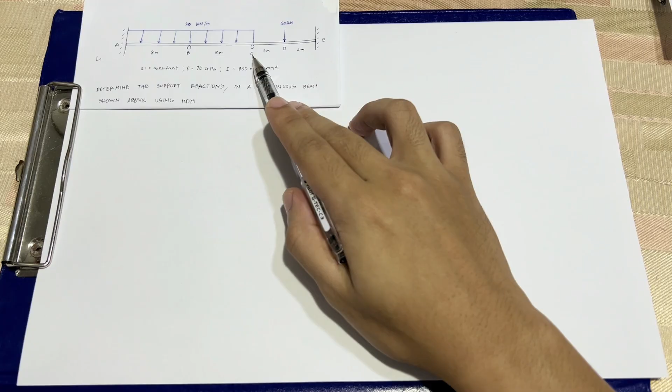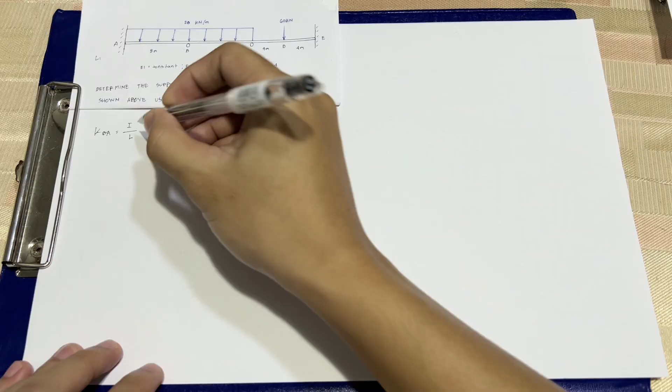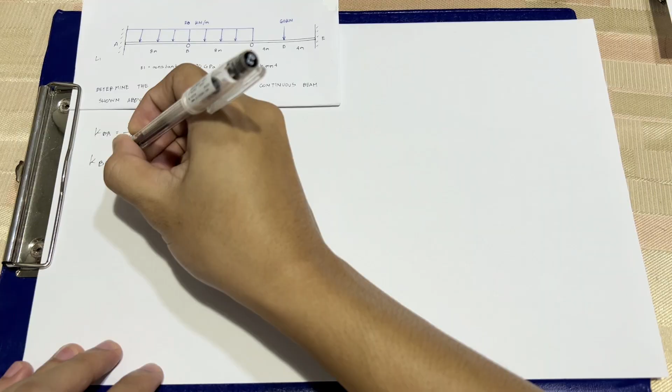So, to start, solve natin yung distribution factor about the joint B and C. Before that, solve natin muna yung member stiffness. Sa member stiffness ng B to A, we have a formula of I over L because the far end is fixed. Ito yung formula na susundin natin. We have I over L, what is the length of that member, that is 8. And then, sa member stiffness naman ng B to C, we have the same formula, I over L, because this one is continuous. So we have I over 8 pa din.

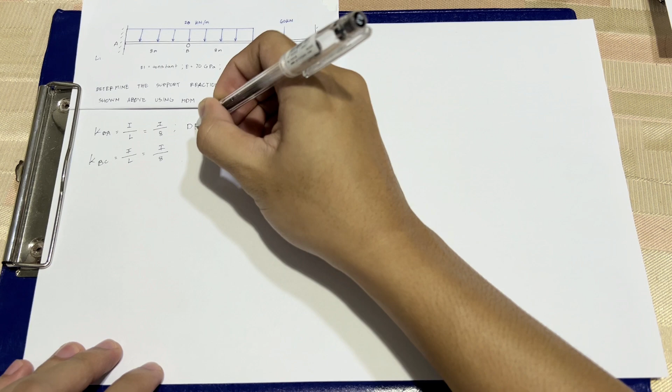Now, solve naman natin yung distribution factor about B to A. Formula natin dyan is the stiffness of one member over the total stiffness at the joint. Dito sa ibabaw, ibig sabihin nun, yung member stiffness nitong BA and then the total stiffness sa joint, pag-combine lang natin yung stiffness ng BA tsaka ng BC.

So, substitute natin yung values. We have here KBA, I over 8. And then KBC, I over 8. And then yung KBA natin is I over 8. Kung mano-mano natin isosolve yan, pwede natin ibaba yung 8. Plus natin yung I over 8 plus I over 8, that will be 2I over 8. Cancel yung 8, cancel yung I. So meron tayong 1 over 2, that is equivalent to 0.5. Pero kung ako mag-solve yan, pagdating na sa mga quizzes, since alam ko na maka-cancel yung I, palitan natin ng 1. So we have 1 over 8 over, this is the main bar, 1 over 8 plus 1 over 8. Same lang yung makukuha nating answer.

Dito naman sa distribution factor ng B to C, palitan natin yung numerator ng member stiffness niya. That is KBC over KBA plus KBC. That is also I over 8 over I over 8 plus I over 8. That is also equivalent to 0.5.

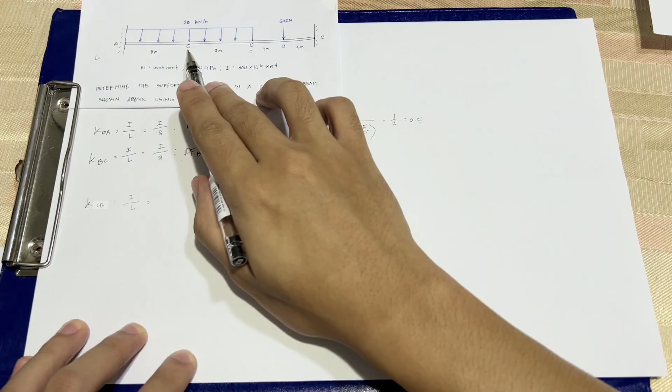Ngayon, dito naman tayo concerned sa joint C. So what is the member stiffness of C to B? That is C, sorry for that, C to B. We have I over L pa din. Since this one is continuous, we have I over, what is the length? That is 8, length of the member from C to B.

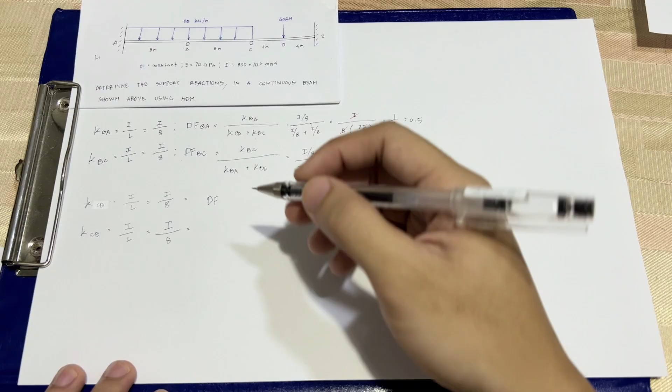So we have the member stiffness naman, C to E. We have the formula of I over L since this one is a far end na fixed. So we have I over 8 pa din. Since both yung dalawang to is similar and same lang dito sa ibabaw, we can therefore conclude na yung distribution factor ng CB is equivalent to 0.5. And then distribution factor ng C to E is equivalent also to 0.5.

So, try to prove that one, solve nyo using this formula. Of course, yung numerator is papalitan nyo nung member stiffness nung concern natin. Dahil the same lang, I over 8, and I over 8 lang din naman yung member stiffness ng CE, so 0.5 din yung makukuha natin.

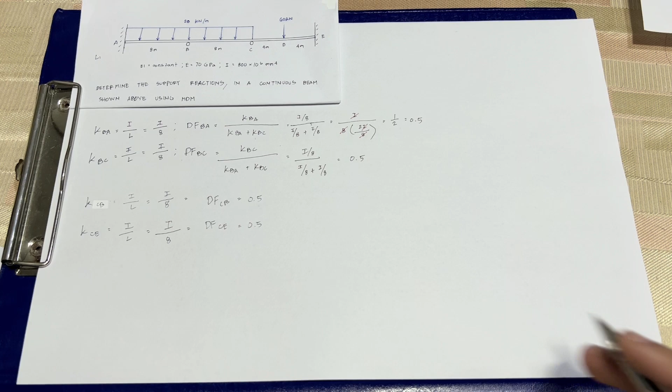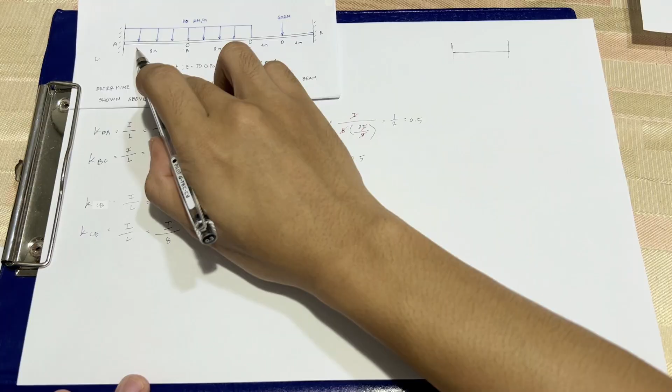So, ngayon, pag-usapan naman natin yung fixed end moment. Dito tayo nakatingin. We have a uniformly distributed load here na 20 kilonewton over meter. This is point A, this is point B. So we have a fixed end moment here, fixed end moment here. We have fixed end moment AB. Ito yung tinitignan natin.

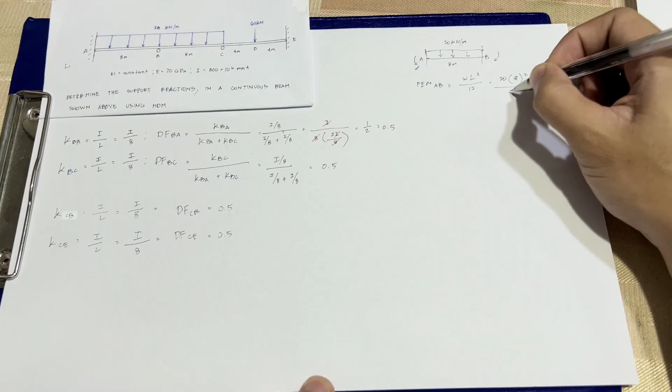So the formula for this one is WL squared over 12. So W is the uniformly distributed load na 20. And then the length is 8 meter. So we have 8 squared over 12. So this is equal to, we have 20, 8 squared over 12. So this is equivalent to 106.67.

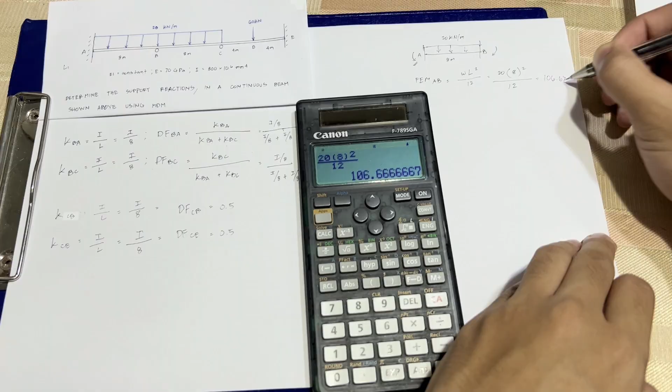So fixed end moment naman ng B to A, dito tayo concern. We have the same formula, however, it is negative.

Due to our sign convention, whenever we have a counterclockwise moment, it's positive. Whenever we have a clockwise moment, it's negative. So we have negative L squared, so WL squared over 12.

Let's substitute the values. So we have negative 106.67. Now let's get the fixed end moment of BC. We have moments here, then moments there. This is the uniformly distributed load of 20 kilonewton per meter, and this one is 8 meters.

Fixed end moment of BC. We have the same formula, WL squared over 12. Let's substitute the values, divide by 12, and we get 106.67. Now we're concerned with the fixed end moment of CB.

As we mentioned earlier, clockwise is negative. So let's substitute the values. 12 is equivalent to negative 106.67. Now let's focus on this member.

So we have a fixed end member. This is C and this is E. We have a point load here at the center, 60 kilonewton. The distance here is 4 meters and the distance here is also 4 meters. Now let's discuss the fixed end moment CE.

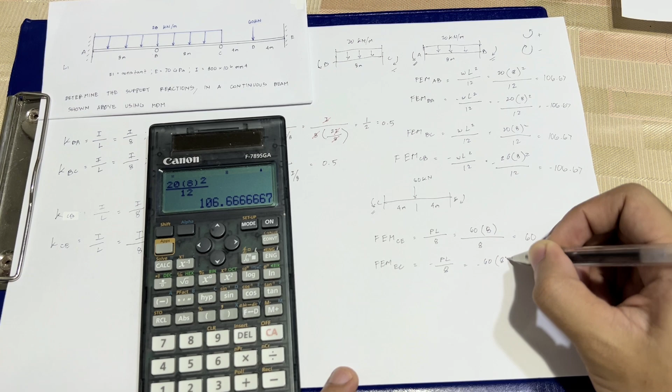Now for the fixed end moment of EC, we have negative PL over 8. Let's substitute, and we're going to have negative 60 here.

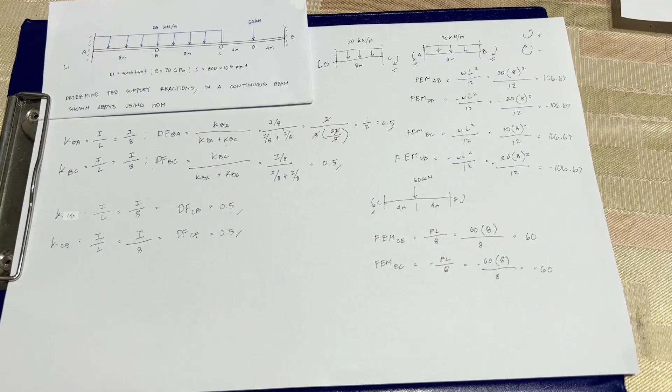Since we already have the distribution factor and the fixed end moment, let's now make a table. Let's move on to our next step.

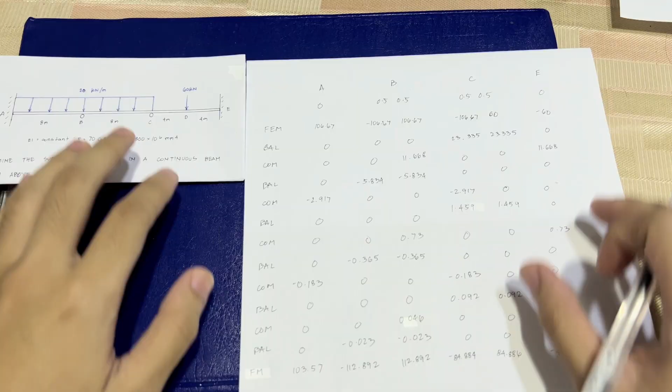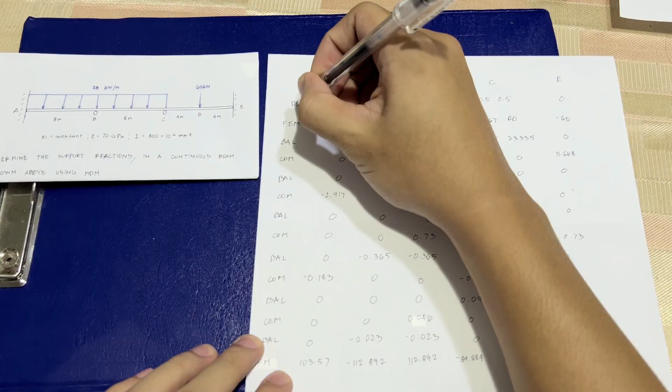You'll notice we have a table here with values. Let's discuss how this was obtained. We have point A here. Since we know that the distribution factor on the fixed end is 0, these are the distribution factors. Earlier we computed that the distribution factor of BA is this.

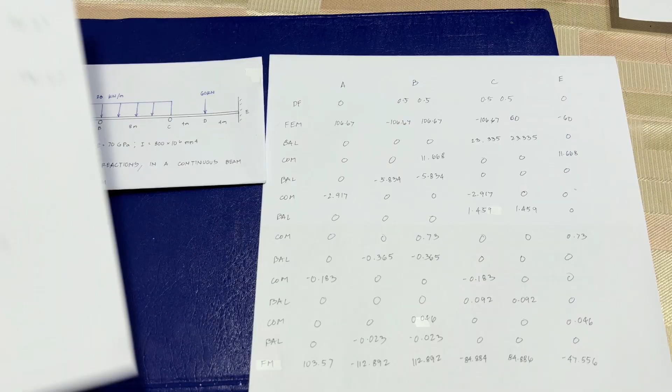Let's show where it came from. The distribution factor is 0.5, that's BA. Distribution factor at BC is 0.5. Distribution factor at CB is 0.5. Distribution factor at CE is 0.5. And this is once again a fixed end, so the distribution factor will be 0.

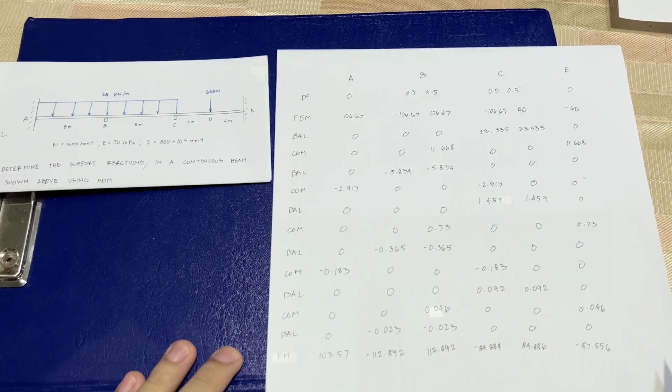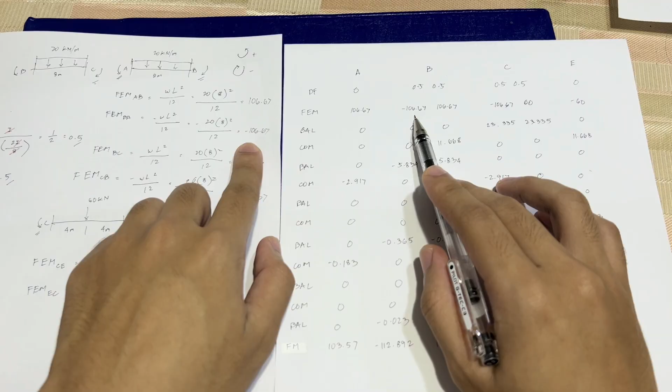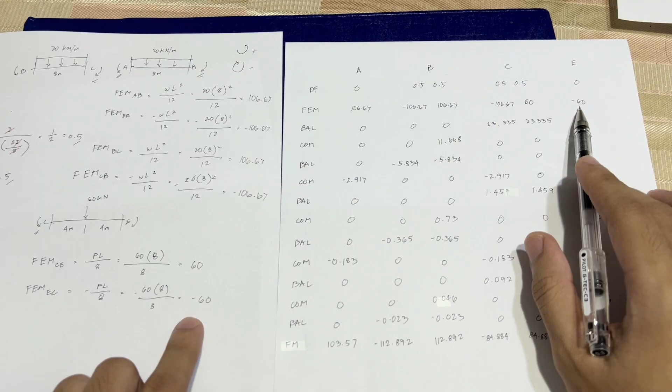Now for our fixed end moments earlier: at A we have 106.67, at BA we have negative 106.67, at BC we have 106.67, at CB we have negative 106.67, at CE we have 60, and at EC we have negative 60.

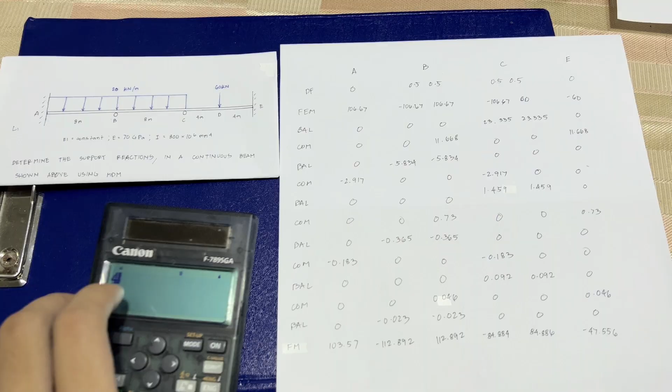The next step is to balance these two. Since we know, let's still calculate: negative difference of 106.67. We know this will become 0. But let's calculate, multiply by the distribution factor of 0.5, that will become 0. Then multiply by the distribution factor, that will also become 0.

Now let's discuss this one. We have the negative difference of those two. Multiply by the distribution factor of 0.5, so we have 23.335, and the same for CE, since they have matching distribution factors, they'll have the same value.

Now, how did we get the 0 here? That is negative 60 times the distribution factor of 0, which is 0. And here, how did we get the 0? We have 106.67 times the distribution factor of 0, so we get 0.

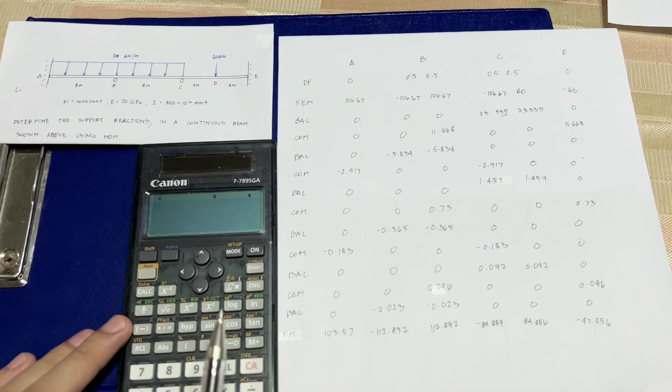And then here, summation: 106.67 plus 11.668 minus 5.834 plus 0.73 minus 0.365, plus 0.046 minus 0.023.

So they have the same magnitude value, however they have different signs.

So here: negative 106.67 plus 23.335 minus 2.917 plus 1.459 minus 0.183 plus 0.092.

So the value is negative 84.884, and then here, summation: 60 plus 23.335 plus 1.459 plus 0.092. So the value is 84.886. Let's accept that.

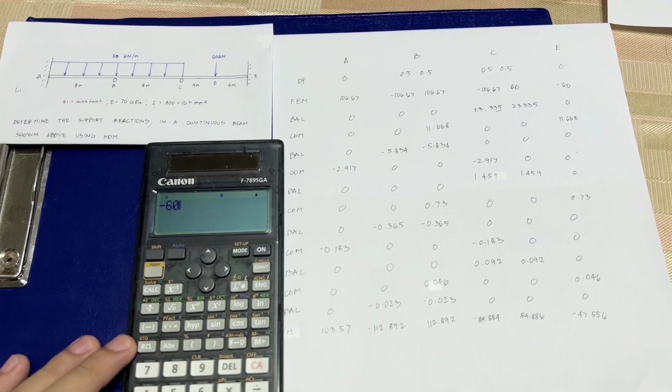So negative 60, summing this up, plus 11.668 plus 0.73 plus 0.046, we have negative 47.556. So now, let's substitute the values.

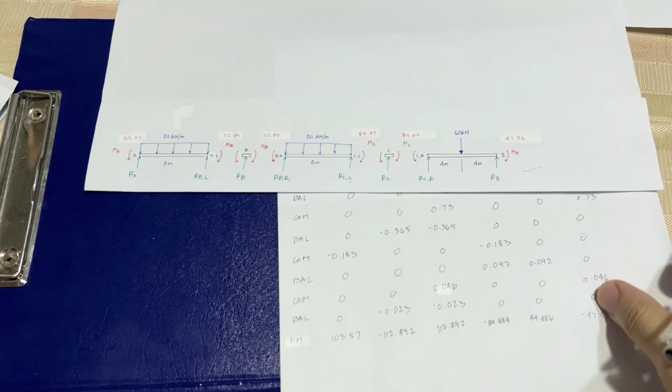Substitute natin yung mga values na final moments na nakuha natin, no? Since kanina, nabanggit natin na clockwise is negative, and then counterclockwise is positive, okay?

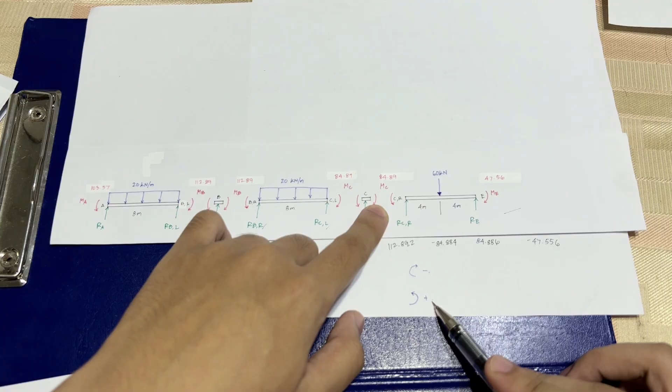So, since this one is positive, so we have a counterclockwise here. This one is negative, so we have a clockwise here. This one is positive, so we have a counterclockwise. This one is negative, so we have a clockwise. This one is positive, so we have a counterclockwise. This one is negative, so you're going to have a clockwise moment direction.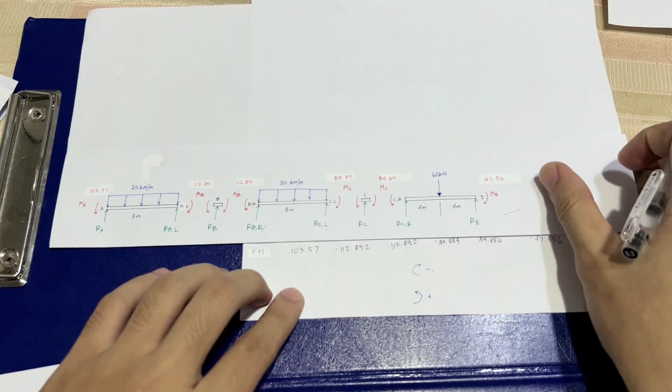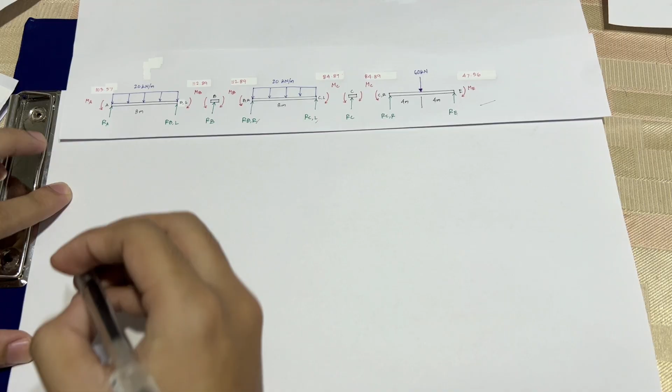So, na-substitute na natin yung values, no? Ngayon, solve naman natin to using the equilibrium equations. So, tingin tayo sa segment AB. Summation moment about B left is equivalent to 0 dito.

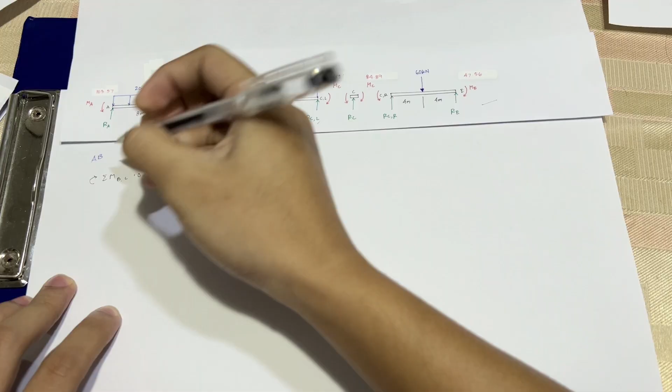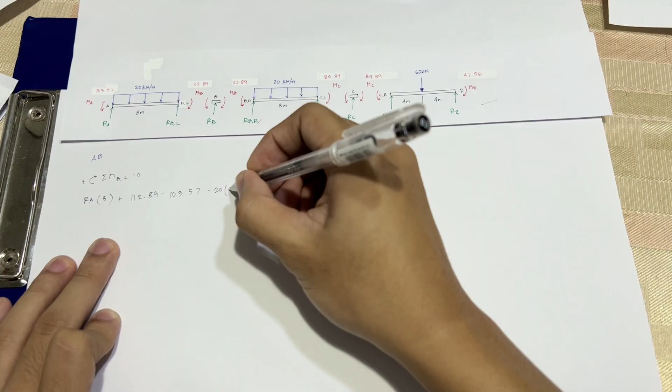Assuming that clockwise is positive, so we have RA times 8, plus yung eto. Since this one is clockwise, so we have 112.89 minus the counterclockwise moment, 103.57. Then minus natin yung downward na external force times the moment arm na 4. So, we have here RA, the unknown, 112.89.

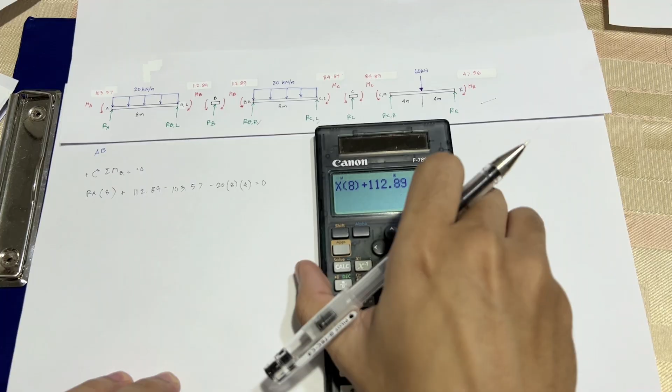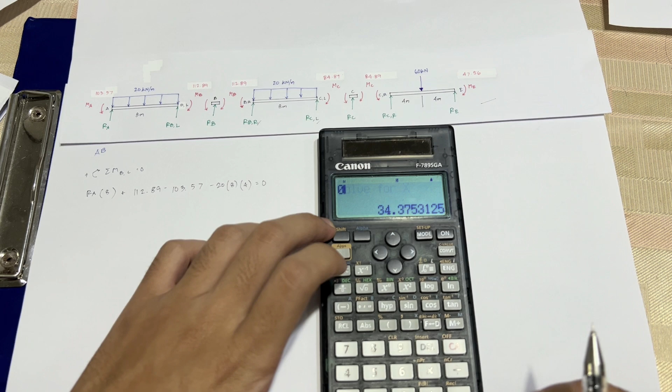Sinubstitute natin yung values na naka-round off sa pangalawang decimal, 103.57, so 20 times 8 times 4. So we have RA, the vertical reaction about A, 78.835 kilonewton.

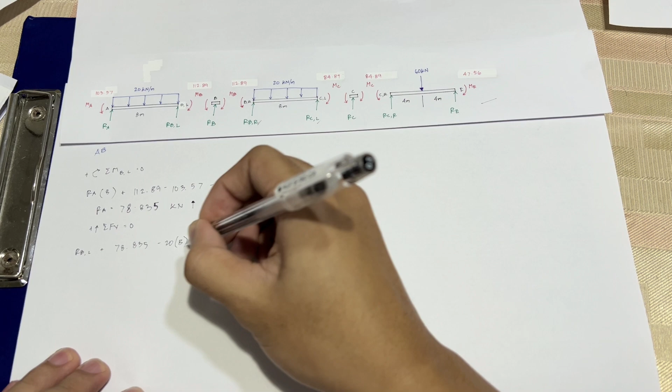So that is upward. Summation forces vertical is equivalent to 0. Upward is positive. We have RB left, plus 78.835 minus 20 times 8 is equivalent to 0. So we have RBL is equivalent to 81.165 kilonewton.

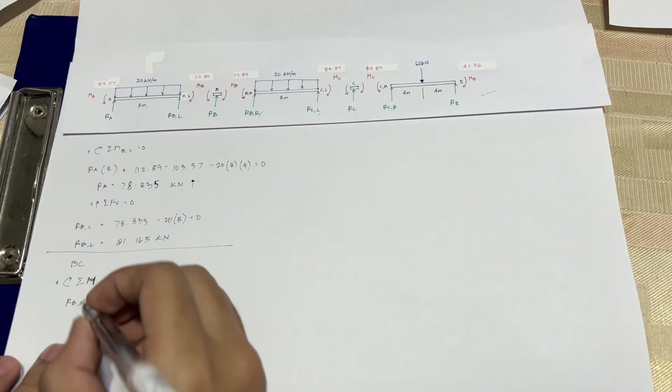Dito naman tayo sa segment BC. Summation moment about C left is equivalent to 0, assuming that clockwise is positive. We have RB right times 8, plus yung clockwise na moment, 84.89, bawas yung counterclockwise na moment, 112.89, minus yung downward na external load, moment arm is 4, equivalent to 0. Unknown natin is reaction at B right: 84.89 minus 112.89 minus 20 times 8 times 4 is equivalent to 0. So we have RB right is equivalent to 83.5 kilonewton upward.

Summation vertical is equivalent to 0. Assuming that upward is positive, we have RCL plus 83.5 minus 20 times 8 is equivalent to 0. So 20 times 8 minus 83.5, yun yung value ng RCL natin, 76.5 kilonewton upward. Tingin naman tayo sa segment CE.

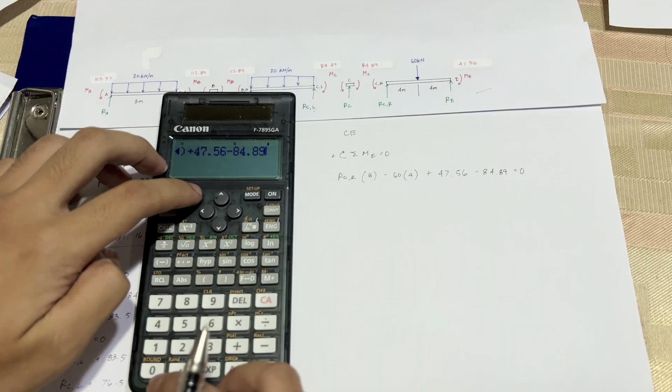Summation moment about E is equivalent to 0, assuming that clockwise is positive. We have RC right times 4 plus 4 is 8. We have minus 60 times the moment arm na 4, plus yung clockwise na moment, bawas yung counterclockwise na moment, that will become 0. Unknown natin yung RC right times 8, 60 times 4 plus 47.56 minus 84.89 is equivalent to 0. Ulit natin: x times 8 minus 60 times 4 plus 47.56 minus 84.89. So we have RC right is equivalent to 34.666 kilonewton upward.

Summation forces vertical is equivalent to 0, assuming that upward is positive. So we have RE plus 34.66 minus 60 is equivalent to 0. So RE is equivalent to 60 minus 34.666, that is 25.334 kilonewton upward. Solve naman natin yung reaction sa B.

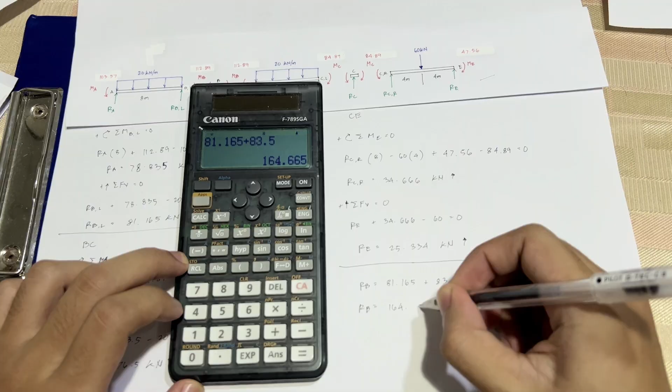RB is equivalent to, ipag-add lang natin yung reaction sa left, and then reaction sa right, about B: 83.5. So RB is equivalent to 81.165 plus 83.5, that is 164.665 kilonewton upward.

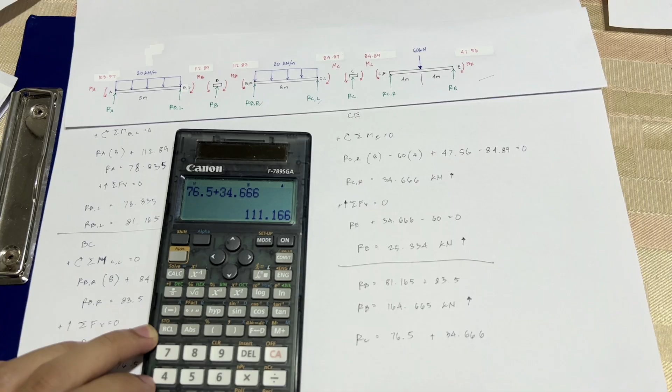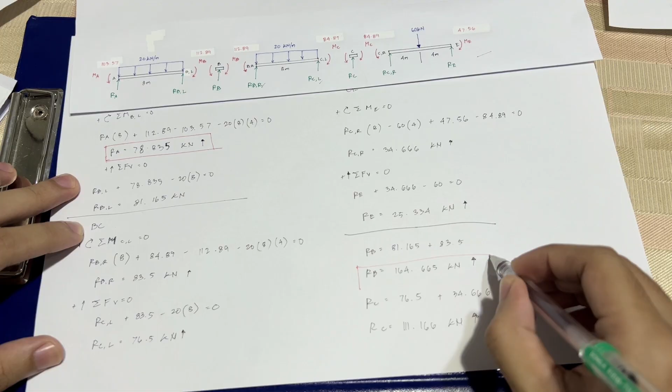Reaction naman sa C, pag-add natin yung reaction sa left na 76.5, then reaction sa right na 34.666. So we have RC is equivalent to 111.166 kilonewton upward. So yung mga final answers natin: reaction at A vertical is 78.835. Vertical reaction sa B is 164.665. Vertical reaction sa C is 111.166. Vertical reaction sa E is 25.334.

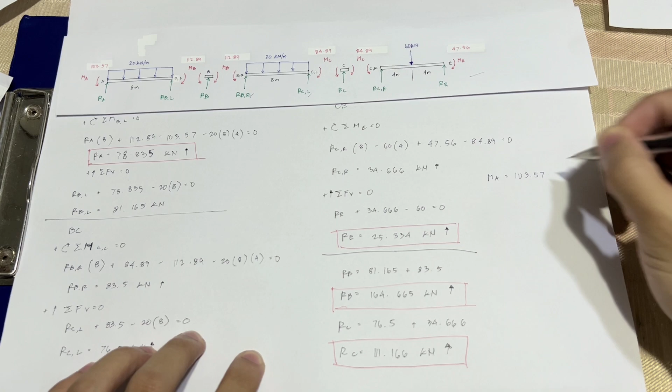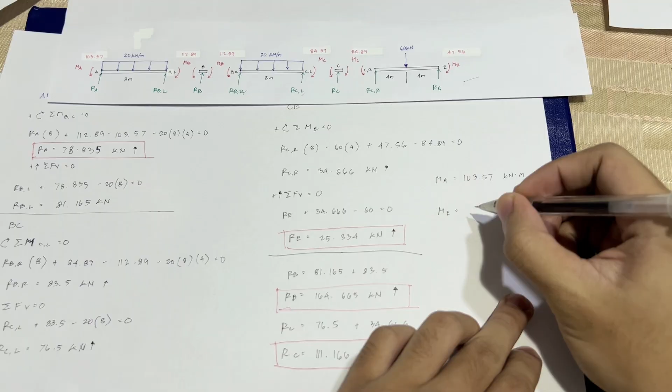At yung na-solve natin kanina na moment sa A, that is 103.57 kilonewton meter, direction is counterclockwise. Moment at E is 47.56 kilonewton meter, that is clockwise. So these are the final answers.